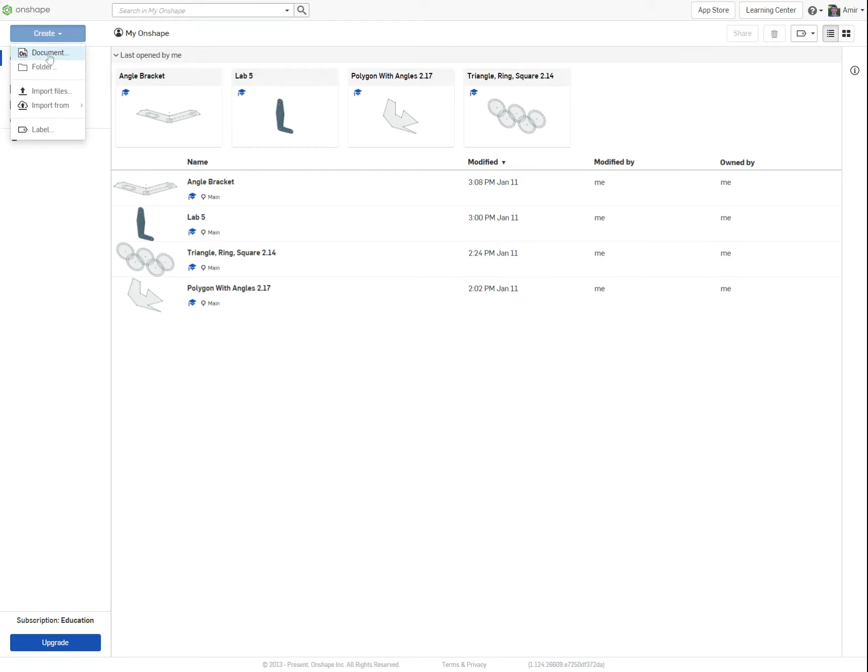I'm just going to call this Lab 5 tutorial. So for this lab we have some instructions, and the idea with those is they're supposed to teach us some new approaches. So let's try and do that.

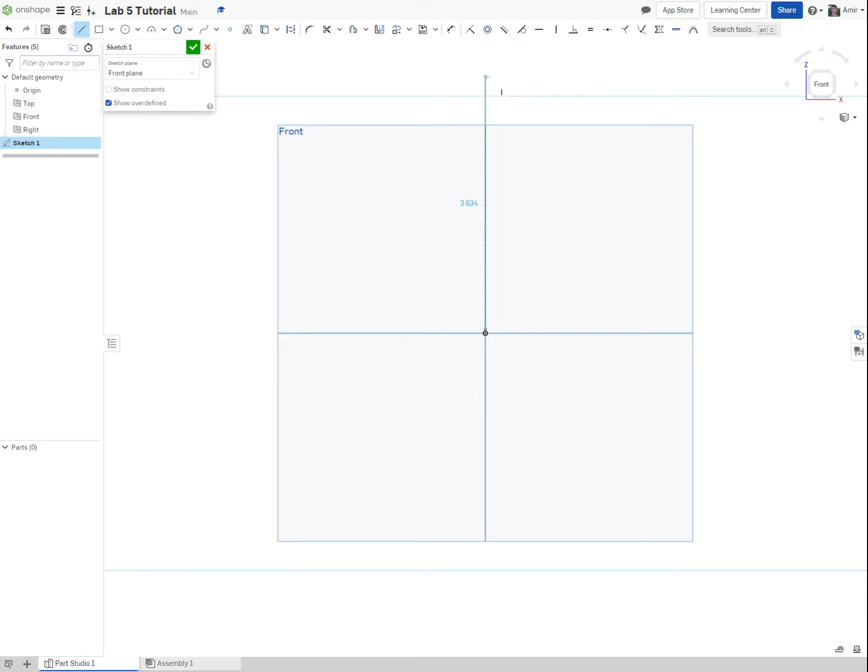First thing it asks us to do is to draw this L shape. As you can see, I already messed up, so let's try that again.

It says to put the circles on it, but make sure this circle isn't at the midpoint. There is a midpoint here, we don't want that, we want to put it here.

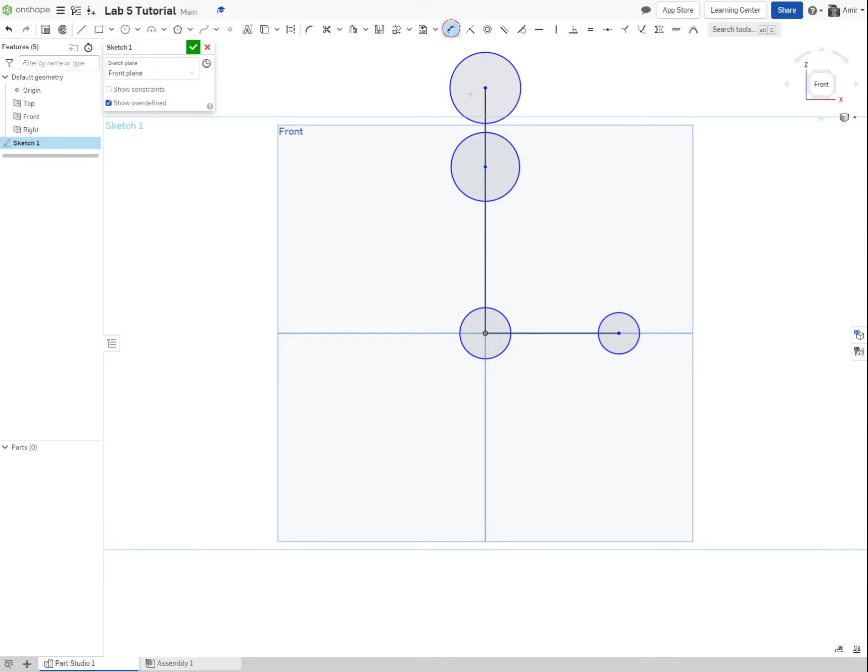Okay, so that is step 3. Step 4 says just to dimension them all, so let's go ahead and do that. This one is 0.75. That's nice. This is 1.25. Let me try one more time. 1.75.

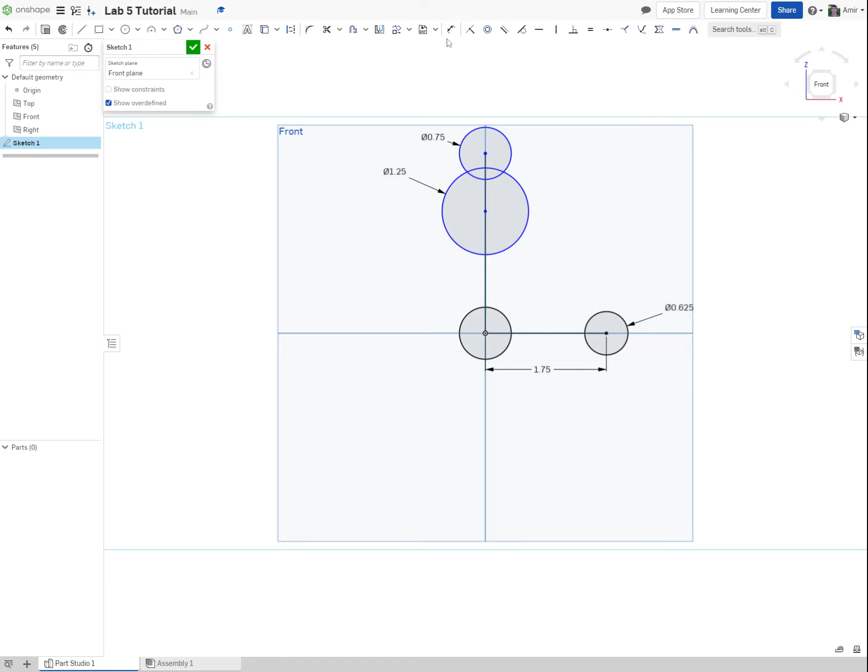0.625. Now looking at the drawing, it's a bit hard to tell, but it seems like these two are equal. Okay, now let me see the distances. From that point to this point is going to be 2.5, and this whole line is going to be 4.5. Let me center and drag up a bit. Is that it? Okay, that looks like everything.

So the next thing to do is add the lines and connect the outsides of all these shapes. It doesn't say to do the tangents in the beginning, it says to do them afterwards, so let's do that.

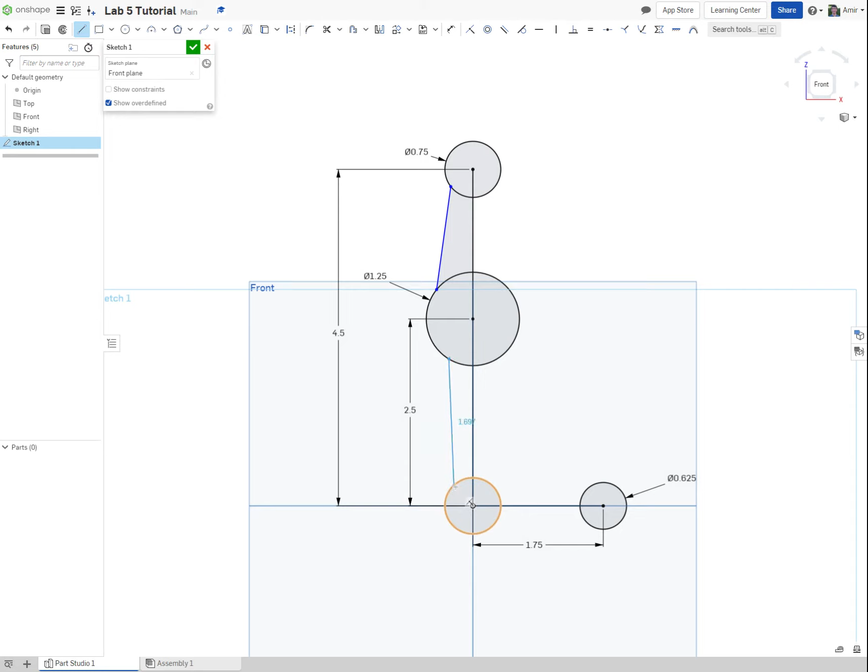It's important, you'll see sometimes they'll snap to straight vertical. I don't really want that, I just want the lines and for them to be touching.

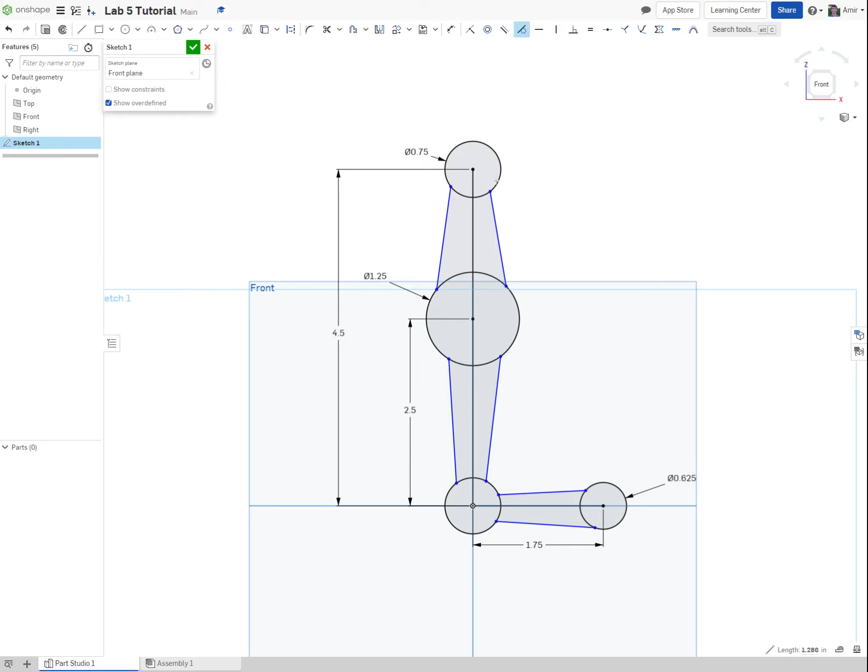Now we can go through, as it says, to use the tangent tool. We already learned about this one, but it's good to have some practice. Almost there. Oops, and there we go. Okay, so now it's fully defined, everything is no longer blue, it's all black now, so that's good to go.

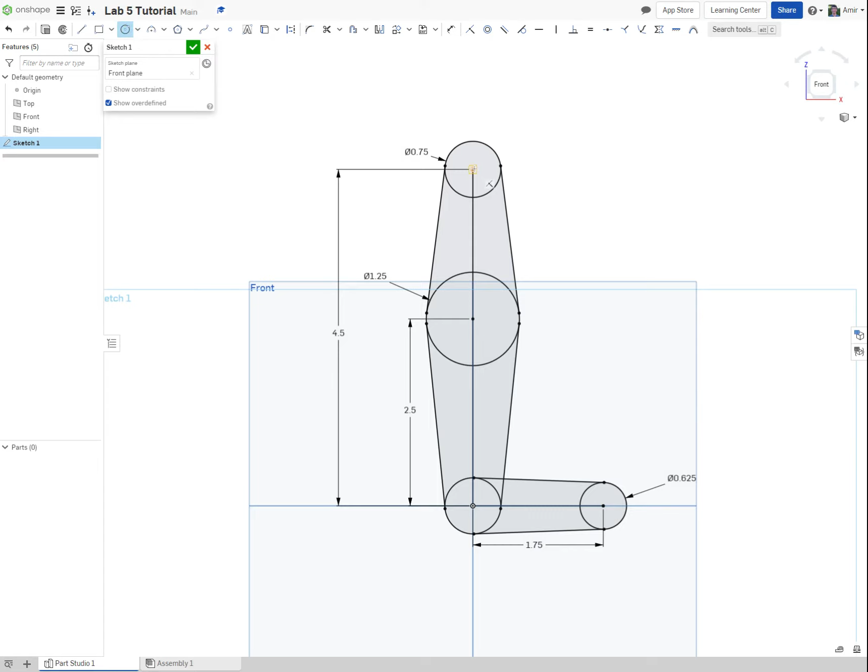The last thing it says is do 4 additional circles and make them equal, so we'll do one here, one here, one here, and here. Those are all going to be equal, so let's go ahead and do that right now. Oh, that's not the right tool, that's the parallel tool.

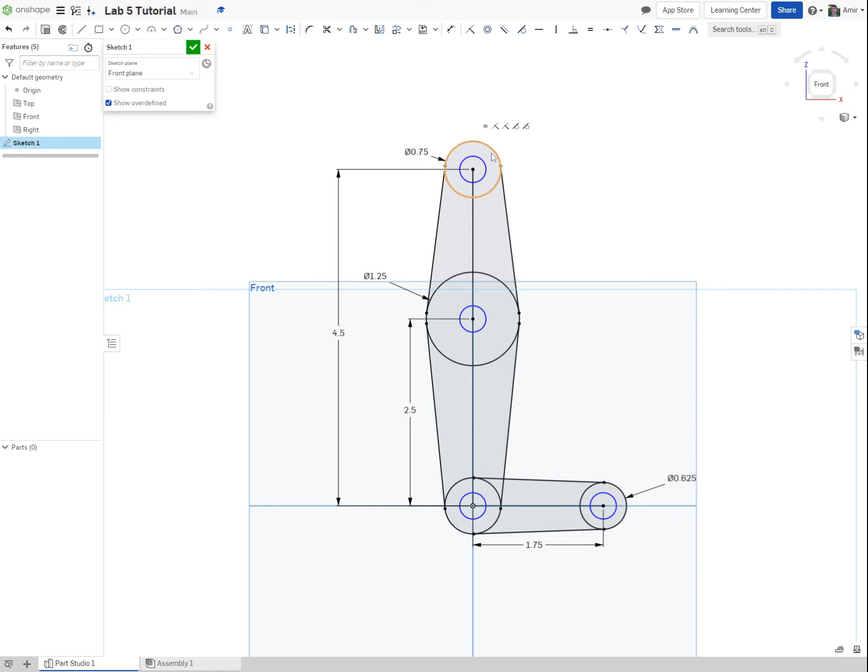So now they're all equal, and then it wants us to make them 0.25, so let's go ahead and do that. Okay, and they all changed, and now they're all black, so that's perfect.

Now we want to make another circle. Put that one here, and we're going to make it from here. We want it to be 1.438. Interesting, we want to make it change into this. Oops, no, that's fine. We want to make it not tangent, it needs to be that. Oh, that's so weird, okay.

0.125. And the radius, it doesn't say, so I guess it's just going to be tangent. Sure, 2 tangent lines intersecting the L.

Okay, and it wants us to curve these, so let's do that. Sketch fillet. Let me try one more time. I want this to be 0.313. There we go, much better.

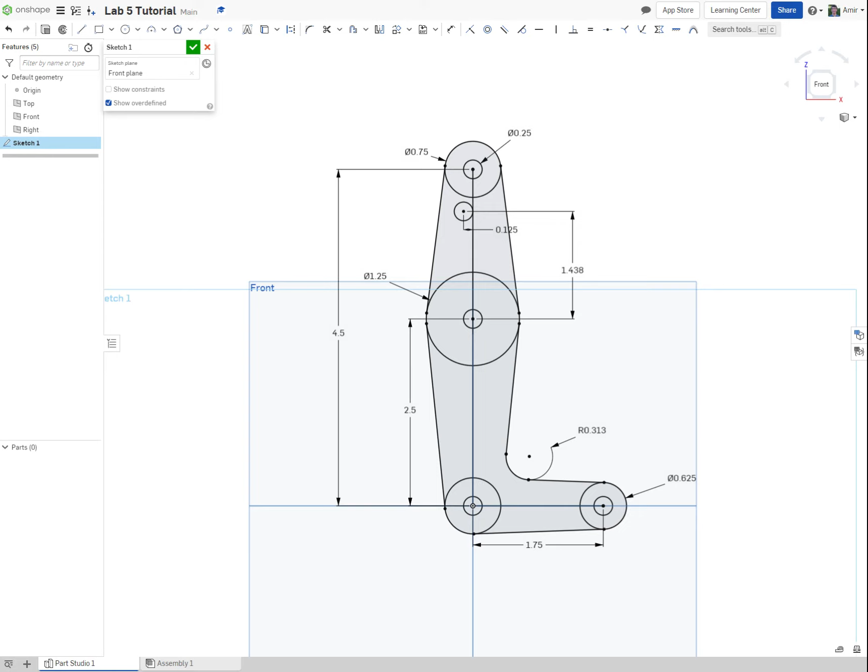Check this out. Okay, and add the remaining dimensions to fully define the sketch. Looks all good. Okay, so the new thing is we're now going to make our project three-dimensional.

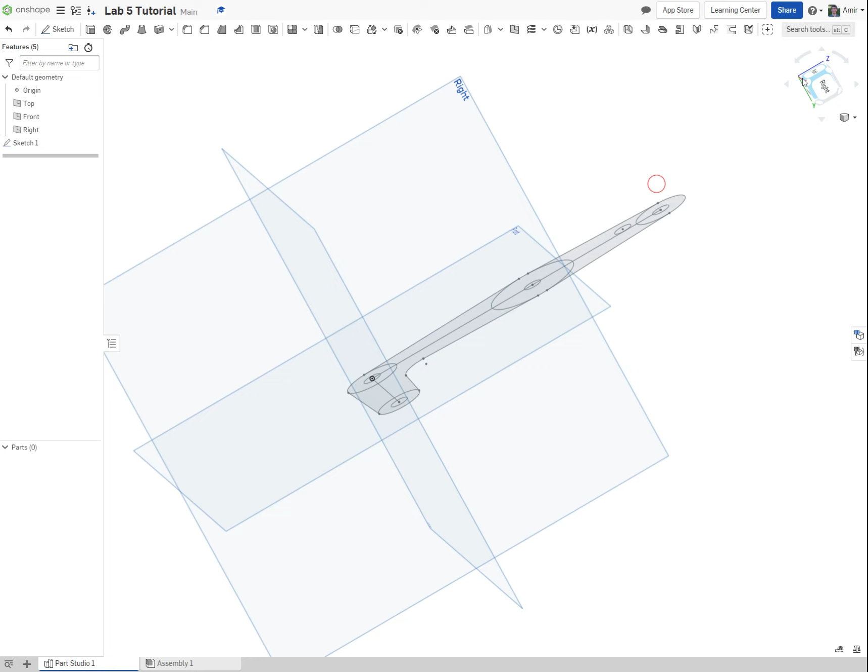So there is our... how do I... there we go. There we go, that's what I wanted. Okay, so there's our sketch. Let's just make it obvious, here's our sketch. We want to extrude it.

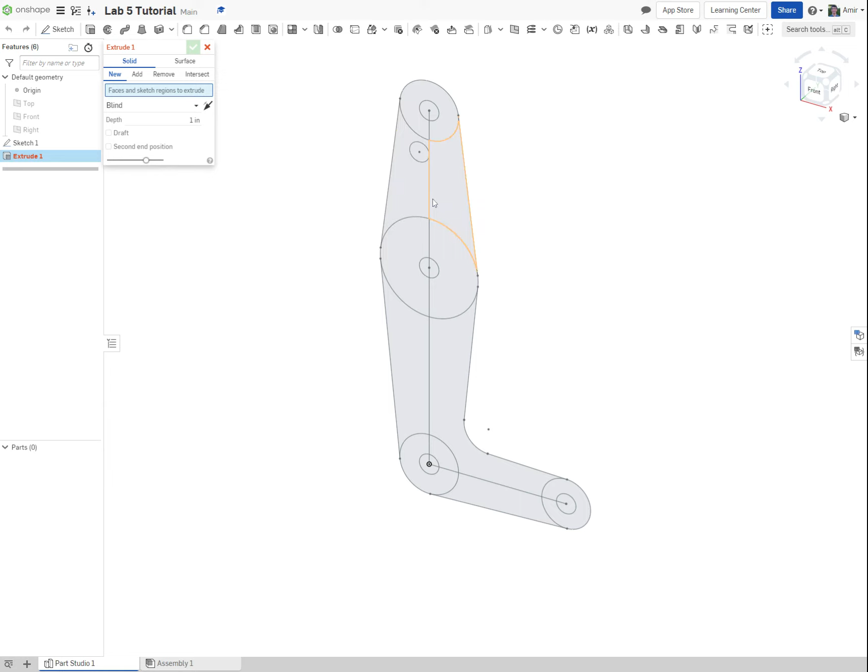So up here are going to be our three-dimensional modifiers, and we want to pick extrude. We want to get all of these, so we could do it like this and just select them all. We could also use the trim tool inside our sketch, but let's just do it this way for now.

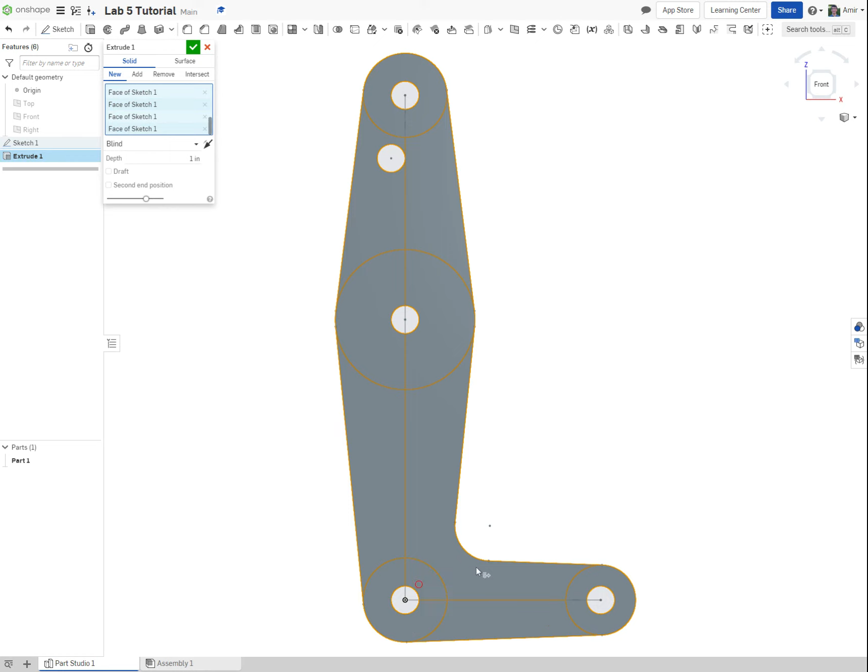This one, let's go back. That looks good, and it asks for 0.12 inches. Okay, looks good, let's go ahead and click the check mark.

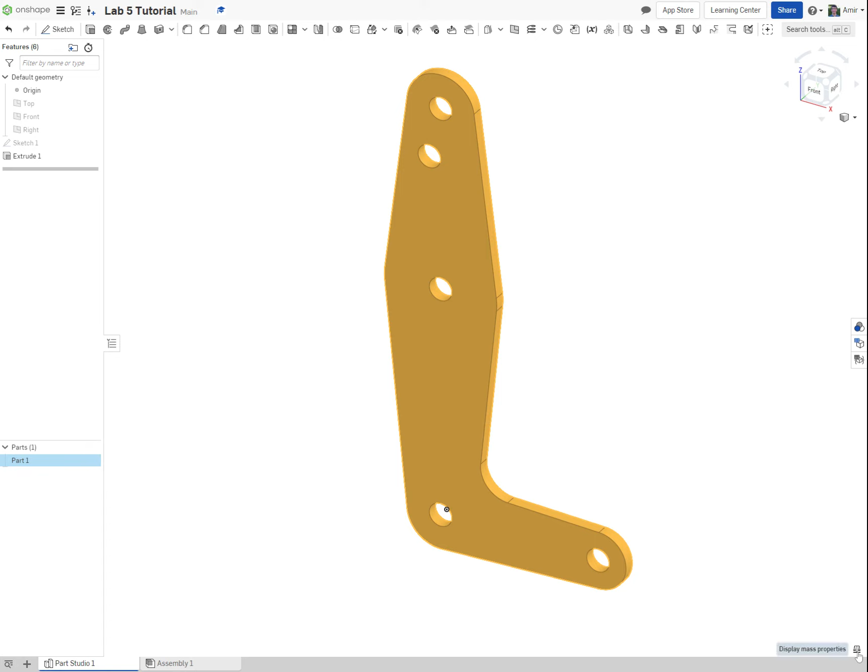And the last thing, we need to select our object, that's right here, or part down here, part from the parts list. Okay, so that's that, it's yellow, it's selected, and we go down here and do display mass properties. As you can see, we get 0.702 inches cubed for our volume, and that is actually exactly what she asked for. So that is how we do Lab 5, or exercise 1.2.1. Thanks.